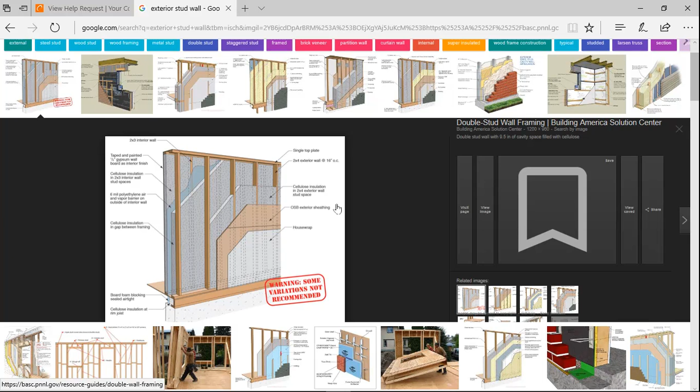So what we want to try to do with this tiny house design is come up with a wall system that isn't going to use that much energy, something a little bit more efficient. I wanted to go through and show you some different examples of how walls are built.

This right here is a picture of a double stud wall, and the whole purpose of this is to get a whole lot of insulation in there. If I look at this one, that's basically a double stud wall going in real life - we have a little diagram of it and the actual thing going in.

This isn't going to help us out at all. If we're trying to save space, we can't really afford to lose this much space by having a double wall. So we could start looking around at some different ones.

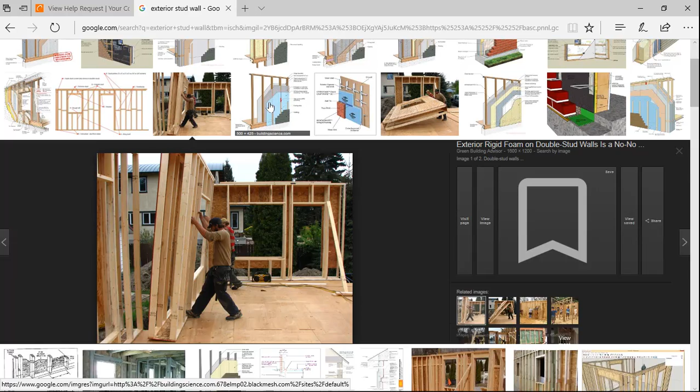This one right here adds a layer of foam to the outside, and then it has foam on the inside. Just looking at this, I know that this wall would end up being between 4.5 and 5 inches thick, and it's going to have insulation between and on the surface. So this would be a pretty good option to use - definitely a lot better than what we were using, the 8-inch.

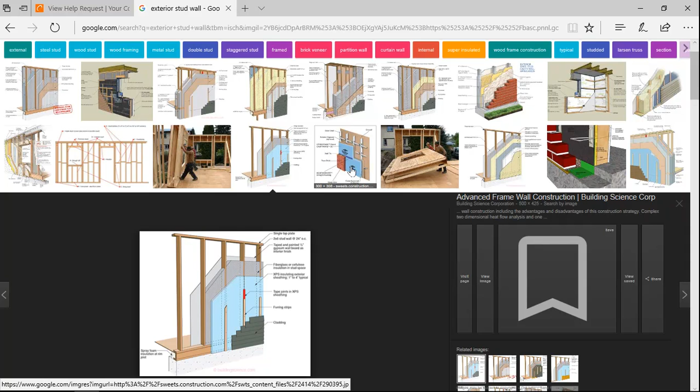This right here is doing something a little bit different, and it's kind of a hard picture to see. But basically, this has steel studs, and it's putting a thicker foam on the outside. Now it also has brick, which we don't want to use, but it's similar to what we might want to use for a wall system.

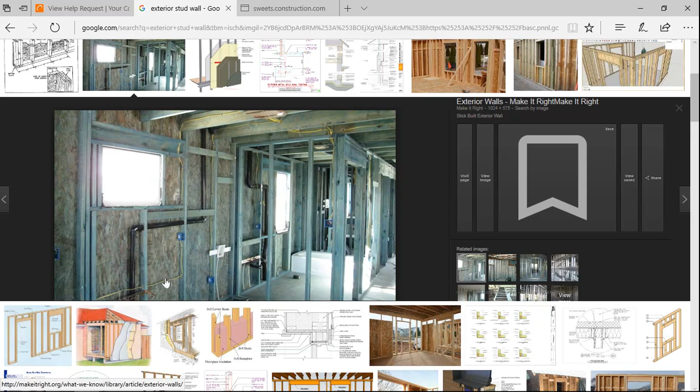So we can just go through and look at a lot of different wall types. Now, whenever we're building our walls, you also want to notice that there's a lot of stuff that goes in the walls other than insulation - we have piping going in the walls, wiring, boxes for the electrical system.

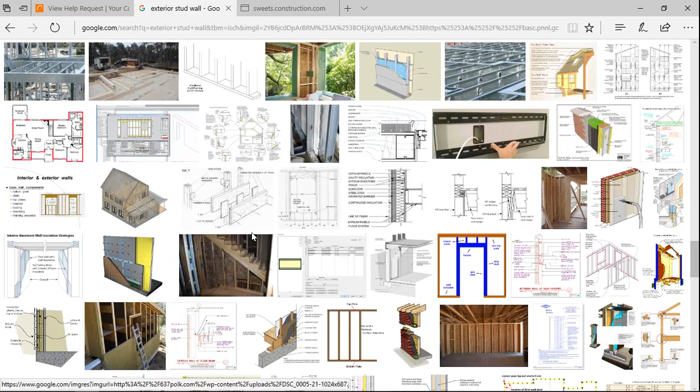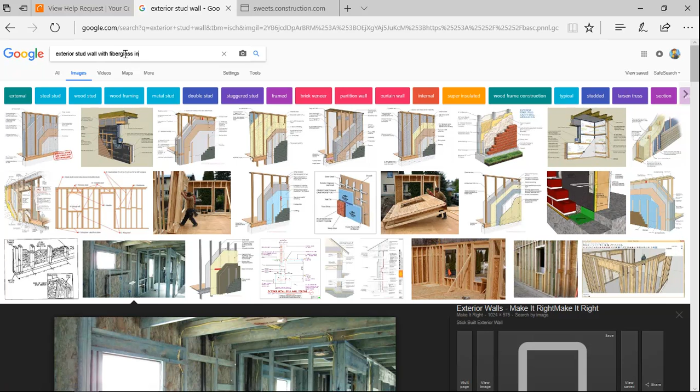I wanted to try to find a picture of a standard wall, which I'm having trouble finding. But basically, the way that we built walls for years and years - let's see if we can type something else in and get a nice picture. This is how we have built stud walls for the last probably 30 or 40 years, since the 70s. So basically they made a stud wall and put fiberglass insulation in there.

Fiberglass insulation is not the best insulator. It does a decent job, but there's a few things that happen. First of all, air and moisture gets in here and it kind of takes away the value of the insulation. This droops - if you ever open up an old wall, a lot of times the insulation will be sagging down, leaving all of this area exposed, and the air can pass right through this. So there's a lot of different problems with that.

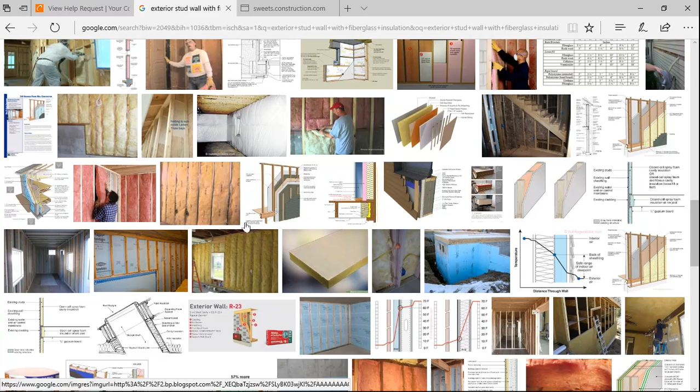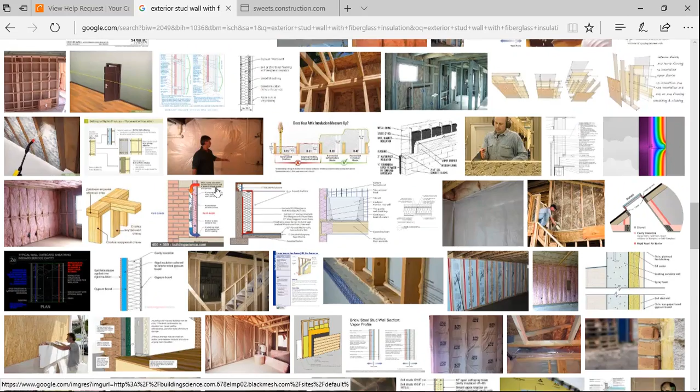People use this more often than anything because that's the way it's been done and it's relatively inexpensive. Alright, so there's a few examples of different wall types. We'll talk more about that.

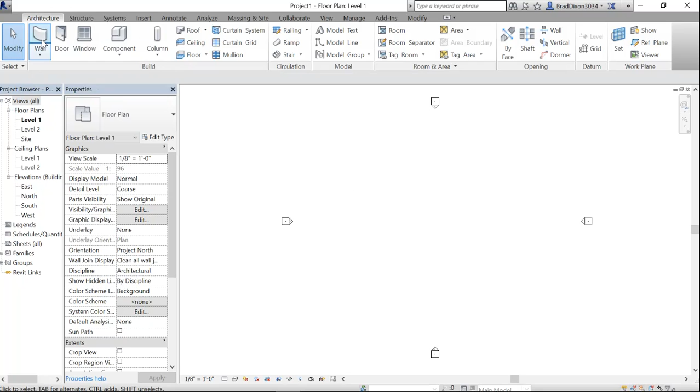So basically, if I want to create my own wall, I'm going to open up Revit, and up here on the Architecture tab, I'm going to click on Wall. Whenever I do that, remember, we have a Properties panel. And if your Properties panel happens to get closed, which it often does with new users, all you have to do is go to the View tab, User Interface, and check mark the Properties panel.

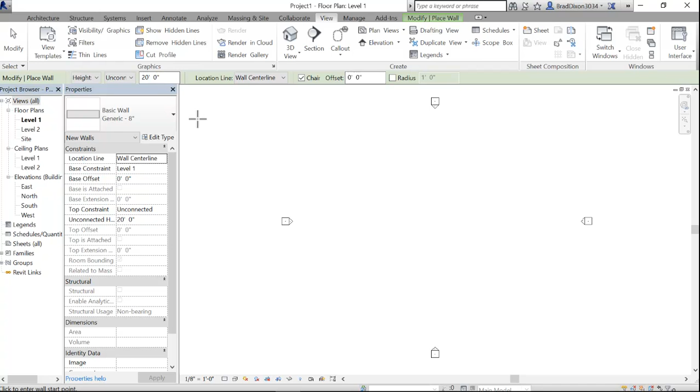So I'm going to go back to my Architecture tab, and look at the wall types. Whenever I click on the wall, this one right here is the default wall type, the basic wall generic 8 - so it's 8 inches thick. I don't want to use that.

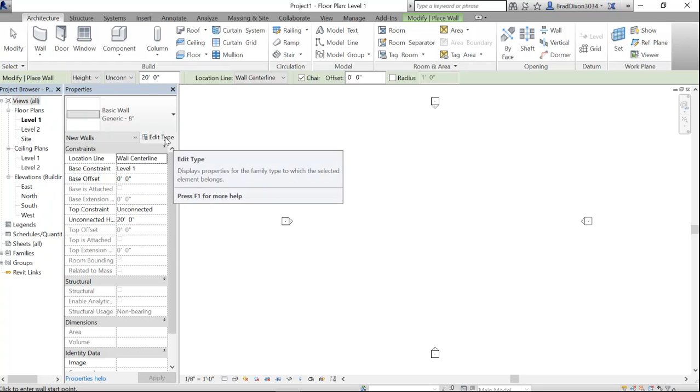At this point, you guys could go through and create your own custom wall types, and the way you do that is by clicking on Edit Type. This screen pops up, and we could go through and change the generic 8 right now, but I don't want to do that. I want to create an entirely new wall.

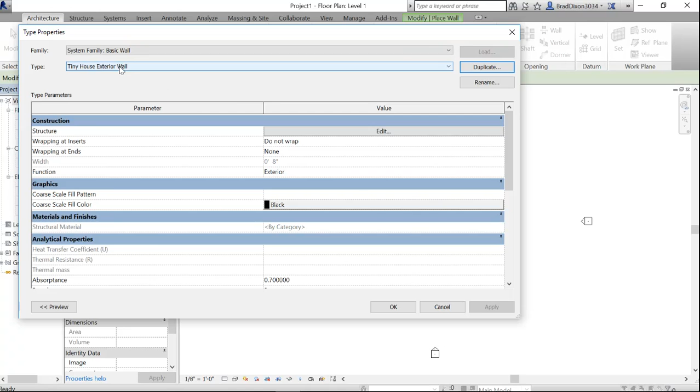So instead of editing this right now, I'm going to do a duplicate. Whenever I do the duplicate, it asks me to name it, and I'm going to call this Tiny House Exterior Wall - give it a nice unique name so I don't forget what it is whenever I'm looking for it. After that, you can see the type is now up here, Tiny House Exterior Wall, and at this point I can click this Edit button to edit the structure of the wall.

Whenever I do this, this screen pops up here, Edit Assembly. Right now the only thing I have in here is an 8-inch structure. I also have these two core boundaries, but they have no thickness. The core boundary we'll talk about later, but it really matters more about how the wall is dimensioned than anything else, so we're not going to worry about it as much right now.

So the first one I would do, let's go ahead and do a real basic stud wall, something that's typical. We're going to come over here to the thickness, and instead of 8 inches, we're going to use a 2x4 wall.

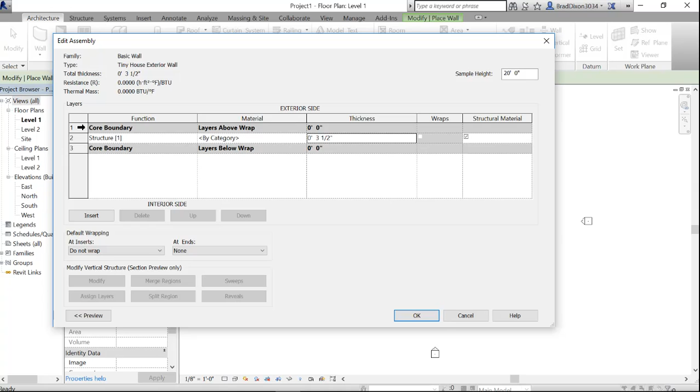The actual width of a 2x4 is 3.5 inches. On the outside, we're going to click on this number 1. This is the exterior side up here. Click on number 1, and I'm going to insert. I'm going to go ahead and leave this as structure, or I could change it to substrate, which is basically like a piece of plywood. It doesn't really matter, you could leave it as structure if you wanted to, but I'm going to change it to substrate.

If I want to, I can go into this material and click on the little button, and now I have all different materials to choose from. I'm just going to go down through here and find plywood.

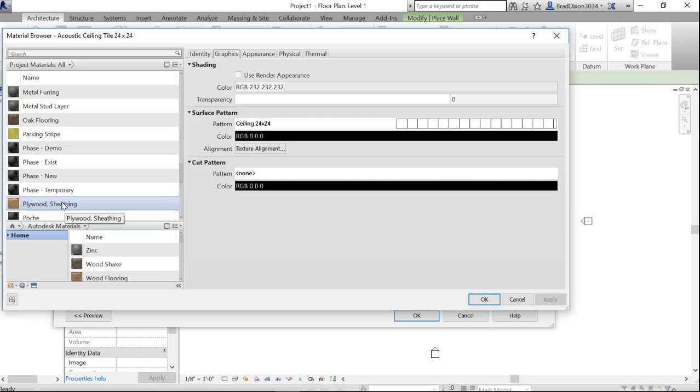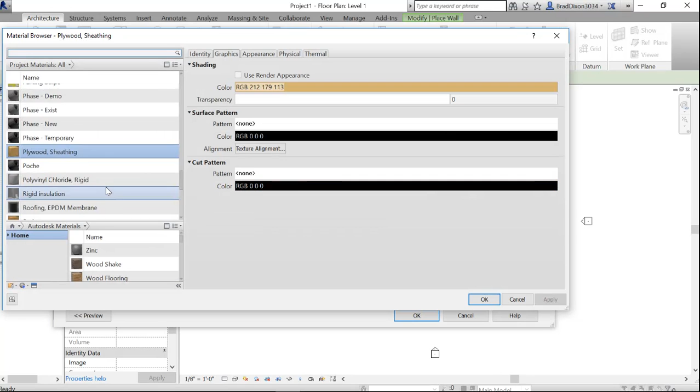I say OK, and then on the inside I'm going to do the same thing. I'm going to insert another one, and I have to bump it down so that it's on the interior side. This one I'm just going to change to finish. For the finish I'll click on the category again, and this time I'm going to look for what we call gypsum wallboard, GWB. Gypsum wallboard is just another name for drywall. I click on that, say OK, and make that 1/2 inch thick.

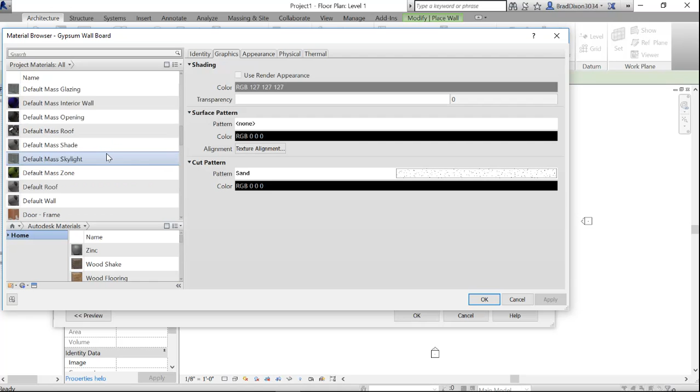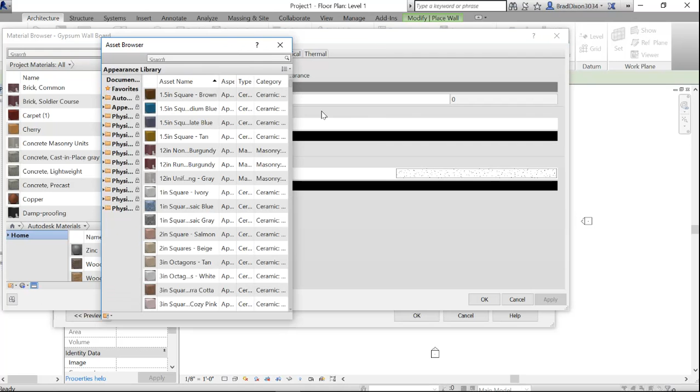On the outside, we're going to look for an exterior finish. A lot of times the exterior finishes are hard to find in here. We'll click that and start looking down through — we have vinyl siding, but they call it something different. I don't think it's in there. We can also go to, let's see, if we open this thing, I basically just clicked on this little button down here, and I can look at different materials that they have also. It always takes a little while to figure out where that vinyl siding is for me.

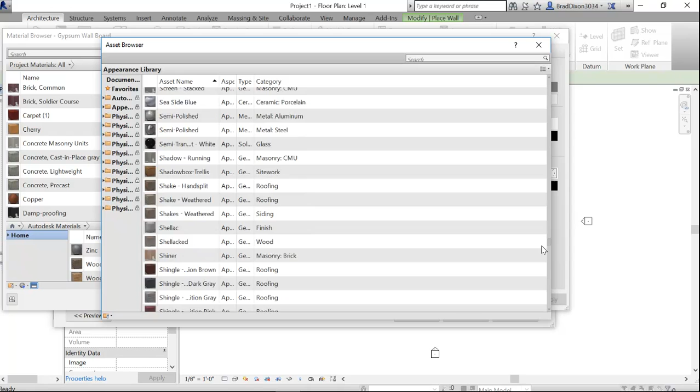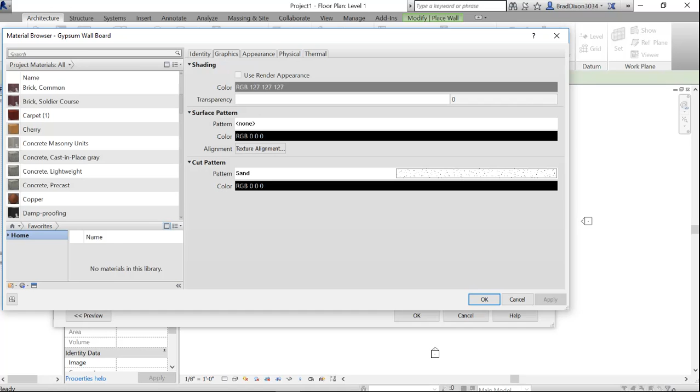Actually what I really want to do is use like a metal siding. There's a million different ones. Let's see if we can find it somewhere else. So under the AEC materials, find siding clapboard, and then there's this little button here, it looks like an arrow pointing up. You click Adds Material to Document. So whenever I do that, now I can actually select that as the material I want to use. I select it up here, siding clapboard, and say OK.

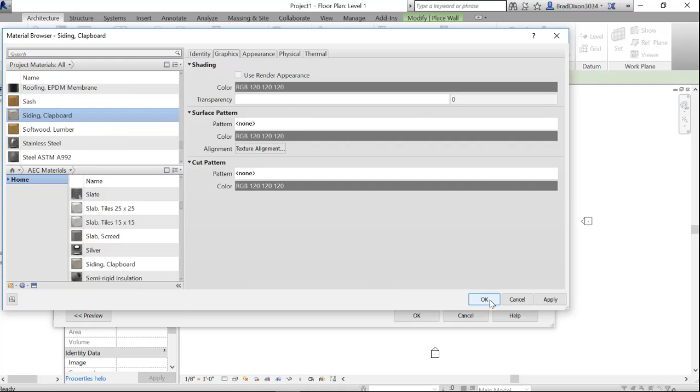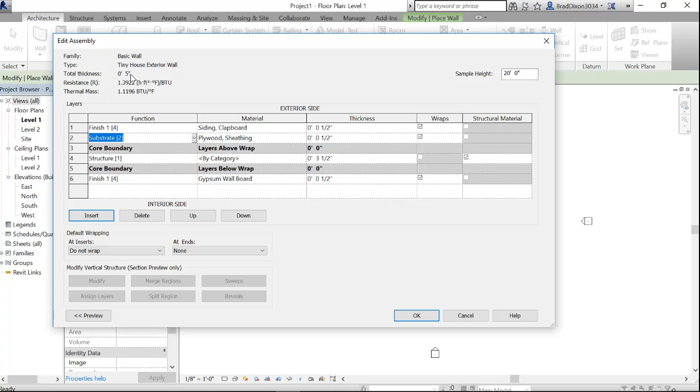Now I have a wall that's basically made out of plywood, and I need to make this 1/2 inch thick. I have clapboard siding, just vinyl siding, which is 1/2 inch thick. Now I have a wall with a total thickness of 5 inches. I can say OK, say OK again, and now I have a basic wall, tiny house exterior wall. I can start drawing walls with this.

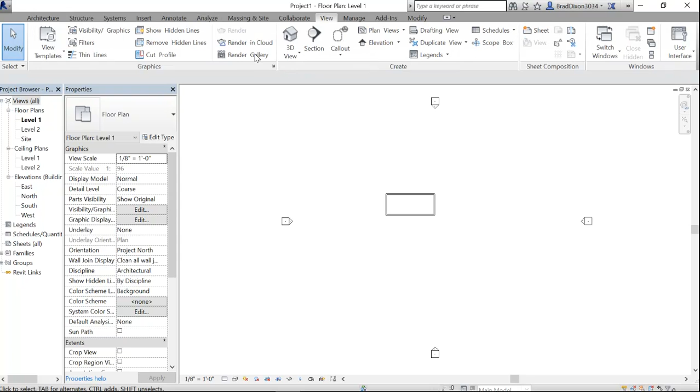Then whenever I look at this in 3D, whenever I go to my View tab, hit the 3D button, I have to come down here to these little buttons and change my visual style to realistic, and now I have a wall with drywall on the inside and vinyl siding on the outside.

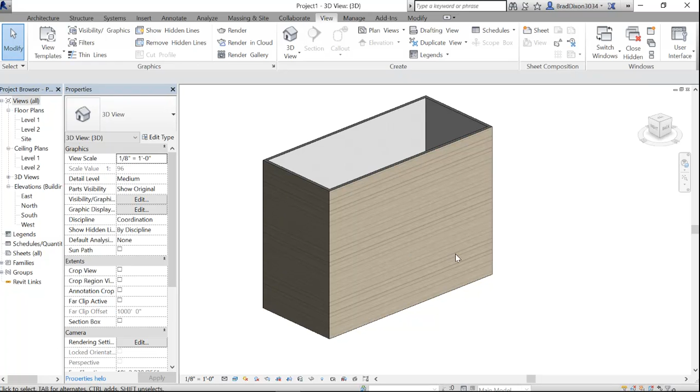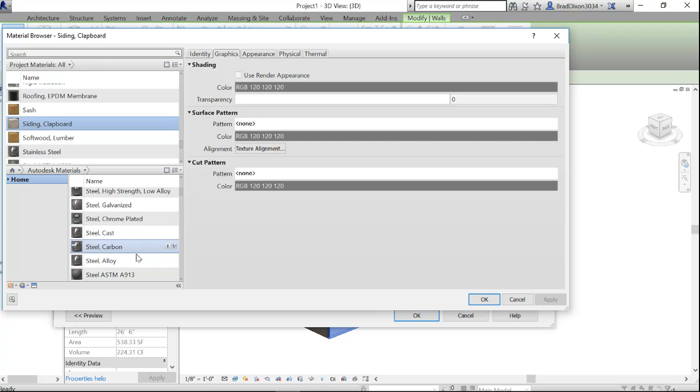Okay, I'm going to show you one more thing. If I want to change this, I can basically click on the wall. Let's say I decided to use some different kind of insulation or some kind of different siding. I can come in here, click on that, and very easily go through here and pick something else out. I'm trying to find something nice for a finish — let's say we use this wood shake. I click on that, say OK, say OK, and I've changed it.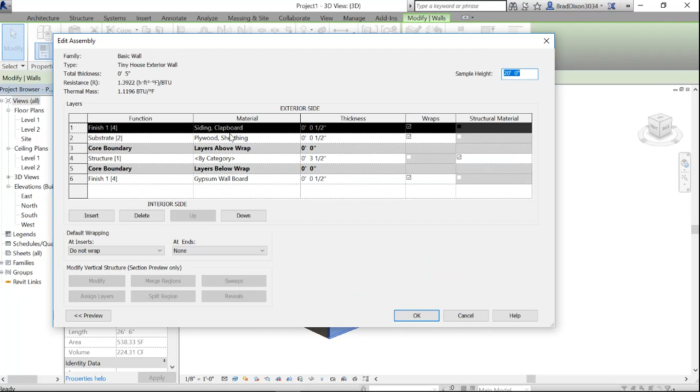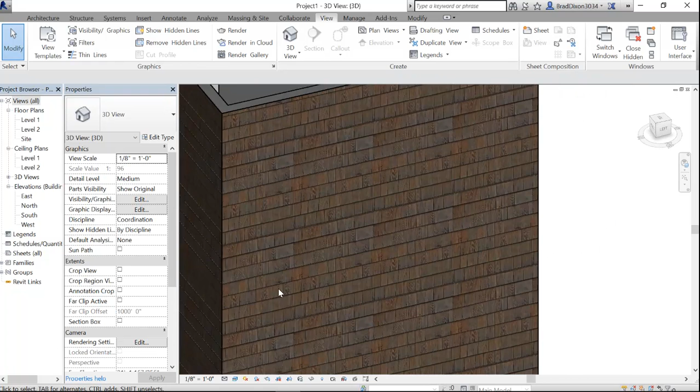Let me try that one more time. I go in here, click on the material. Once I find the wood shake, I need to hit the button to make it go up to my project, and then click on it and say OK. Now I have a building that's made out of wood shakes. The nice thing about that is you don't have to get tied to using the first wall that you create. You can design your entire building and then change your wall after the fact, and it's going to update automatically for you.